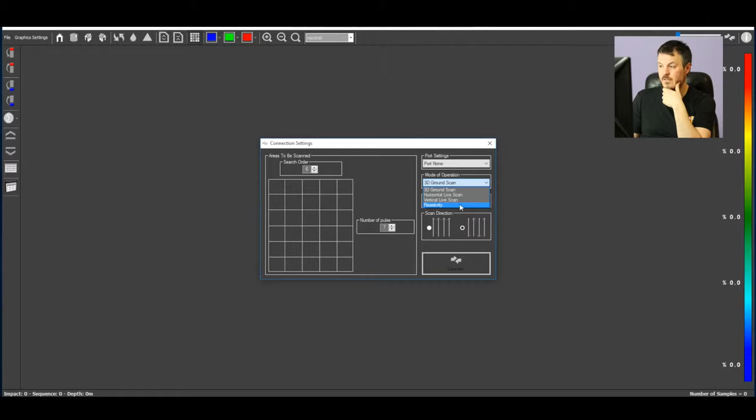Then you have to choose which kind of scan you're going to do. 3D ground scan is what you use for all our radar series. Okay? Horizontal live scan and vertical live scan are used only with X1, X5 and X1 Pro. And resistivity is for IRS or the resistive feature of X5. But here we're going to use ground scan. And then you just press connect.

We would like to remind you that on each DRS device you can choose manual or automatic scan. For automatic scan, the machine will beep. So every beep you will make a step. So it does like beep, you make a step, beep, you make a step. It gives you a rhythm. It's a very nice feature. Or you can use the manual feature. With the manual feature, every time you make a step, you just press the joystick. Okay?

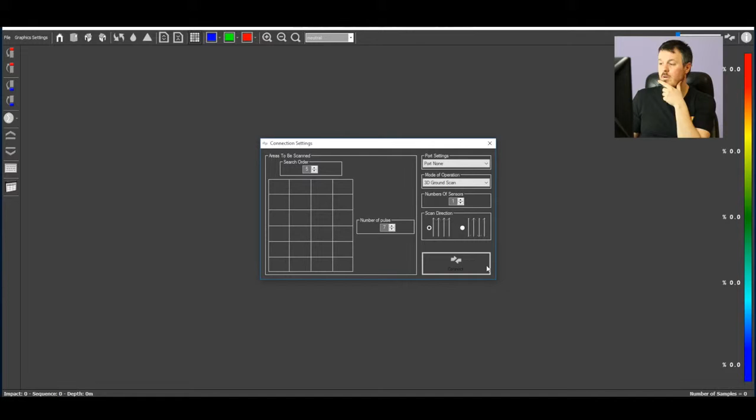Now, let's see the file. We've just recorded an iron object. Here it is. Let's start with 2 dimensions. You see, here you can see a red square, always on the lower right hand corner. So basically, we've been scanning 16 steps by 6 columns. So 16 steps of 30 centimeters, that's barely 5 meters, by 2 meters.

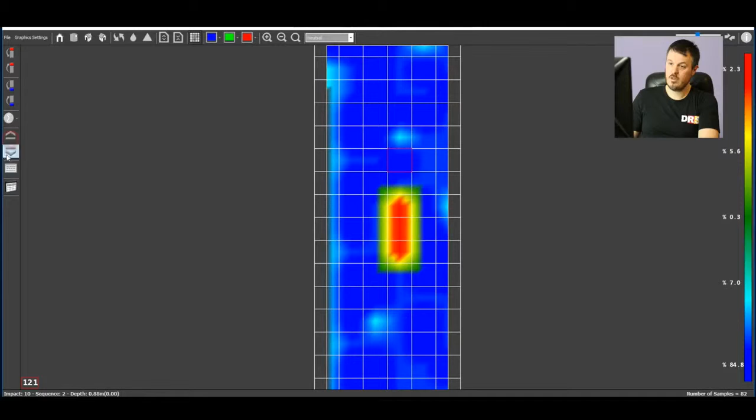So look, you can navigate like this with a keyboard, or you can also use this thing. There is an embedded keyboard here. Okay? But we will use this. Every time you move the cursor, you can see on the lower left corner that the value changes, 121. Now here, where the object is, we have 235, meaning that we definitely have a metallic object.

How can you make sure it's a metallic object? When you open a file, you can see on the right corner a scale of color. If the metallic object is red, yellow and orange, look at the total of the first 2 values, see 2.3 and 5.6, where it's barely yellow-orange. If the total is below 10, then you can imagine this target is metal. Let's see, 2.3 plus 5.6, that's 7.9. So definitely red here marks a metal object.

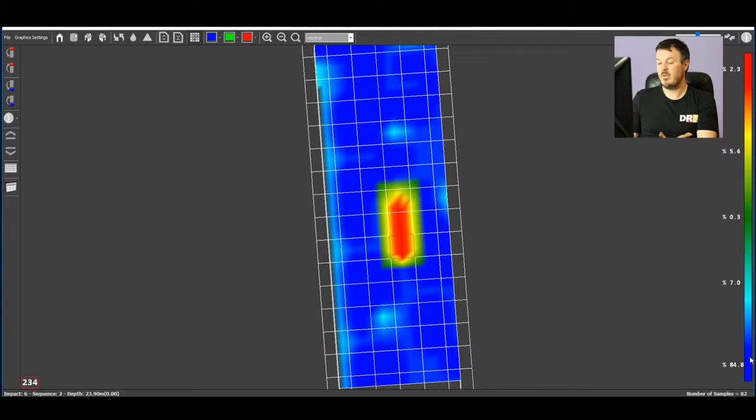But the blue, we say it's a cavity, but not always. It can also be a field that has been turned. So here we have 84.8 for the dark blue. If it is a cavity, it has to be 100%. If it's below 100%, it's not a cavity, it's just ground, okay? So here, 84.8, it's not a cavity. Here we have a metallic object, definitely, but it's not in a cavity, it's just in regular ground.

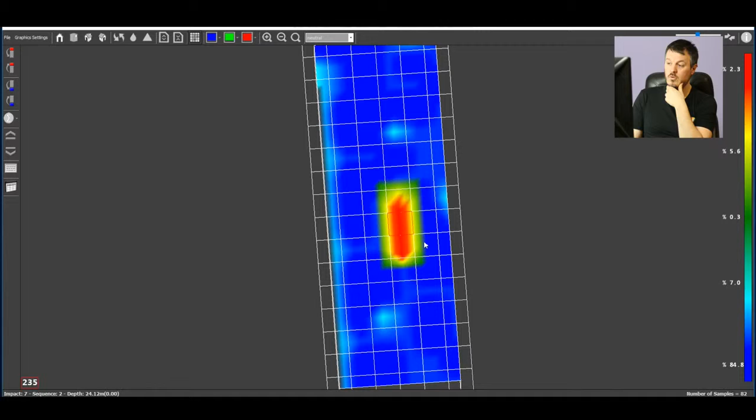How can we determine the size of the object now? Okay, we have three squares for the length times 30 centimeters, that's 90 centimeters, let's say 1 meter. Let's imagine the width now. The width is just one square, see. So that's 30 centimeters. 1 meter by 30 centimeters. The buried object on our test field is basically an old rusty pipe, okay?

Now let's try to imagine what kind of depth we have here. Okay, so let's go 3D.

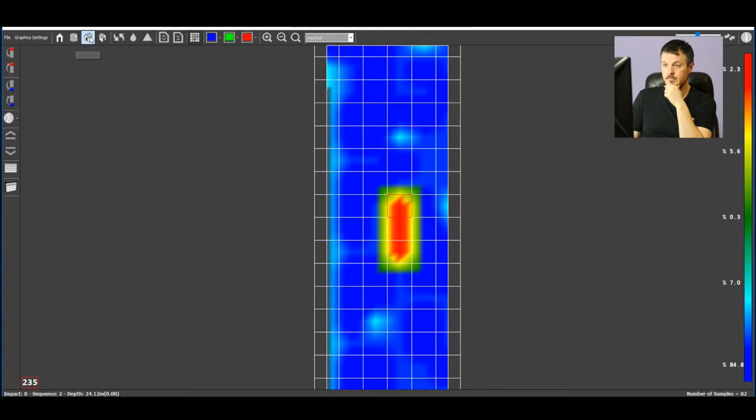Okay, you can see the depth is here. The first thing you have to do when you open your file is tell the software which kind of soil you've been scanning. Here we use sandy, okay? Remember that the percentage of humidity, the type of ground, whether it has rocks or not, will really influence the result you get on the software. So sandy is pretty neutral.

So let's use these two arrows on the left of the software to determine the depth. So the object starts around here, 2 meters, you see 199, and goes to 270. So our metallic pipe is between 2 meters and 2.70 meters deep, okay? Since it's a pipe, it's round, it's 30 centimeters wide, so it's very good and it's accurate. So you have a 30 centimeter pipe between 2 meters and 2.70 meters deep.

Very interesting here, you can see that there is a very visible cut. When the red is cut like this, it's metal, but most of the time it's iron. When it's cut like this, it's iron. It means that the signal has been cut. And you have a really high chance that this is iron.

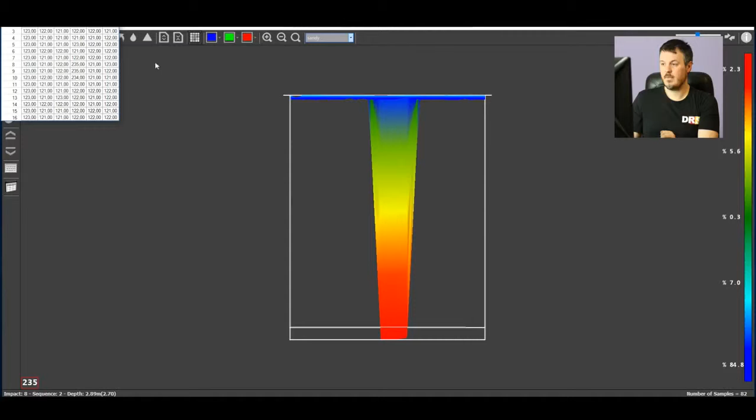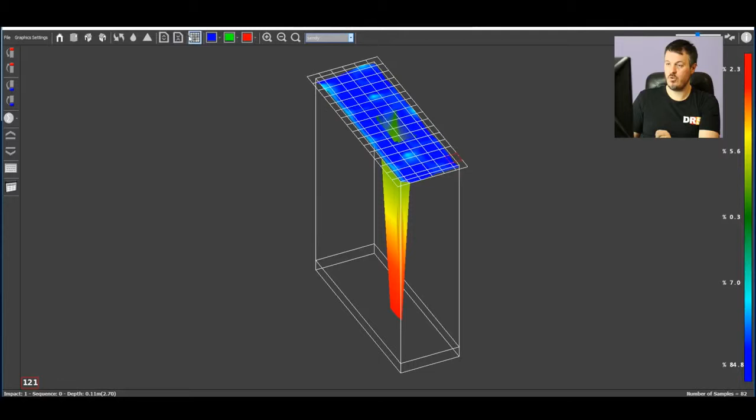Finally, we'd like to show you this. Let's get back to 2D. You see here we move the cursor and you see the object is here. Okay, you see it's still moving here. Our object is here and you can see the value here. Look, 235. Let me show you. If we get back to 2D, okay, let's open this. You see it's here.

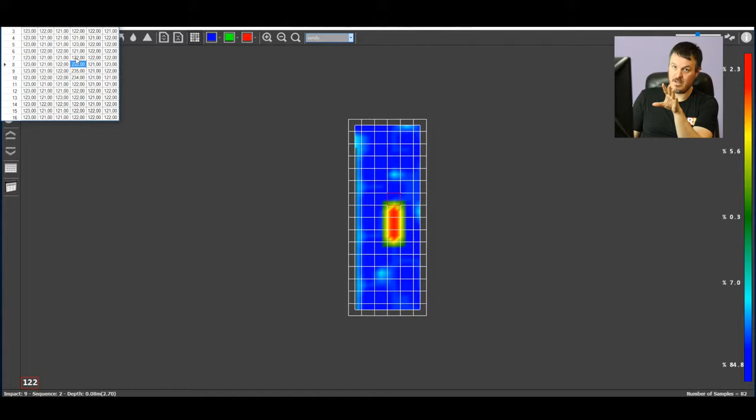Our value that's interesting is 235, 235, 235, 234, and it's row number 4, 1, 2, 3, 4, you see, and it's step number 10, basically it's here, you see, so it's perfect. You see the value here, 235, that's our metallic object, and you can see the scan values appear and are interpreted directly by a color in the software. So you see it's very, very neat. You can determine the size and the depth of the object thanks to our DRS 3D software.

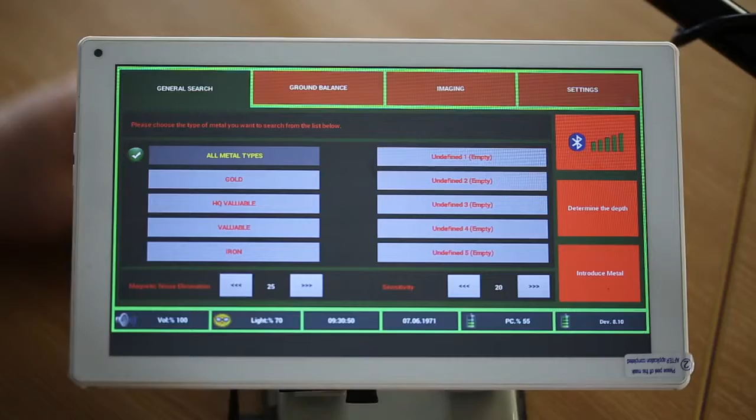There's no Bluetooth. So to activate Bluetooth, of course, you turn on the control box and then you click here. Then it will synchronize. Connected to Ground Expert. And then it will tell you which coil is connected. Small coil is connected. So let me show you all the features. Remember, we're inside. So you should never use a metal detector inside, but for the demo purpose, we have to. So there's a lot of electromagnetic interference, what we call EMI.

So first, magnetic noise elimination, we try to eliminate, you see, okay. Then sensitivity, the more you put sensitivity, the deeper it goes, but here, we need it to be stable for the demo, so we only put 20% sensitivity, even 15, because under the table we have iron, so we may have a problem. So general search shows you what you're going to detect, which metal you want to select or not. Ground balance is basically what you have to do first.

Ground balancing is usually something complicated with other metal detectors. This one, Ground Expert, does it automatically and it's very easy. What you need to do, you put your coil 3 centimeters above the ground. Same thing for the 45 centimeter coil. If you're going to use a 1 by 1 meter frame, you have to put it 10 centimeters above the ground. Then you just press ground balance.

The value will go usually between 120 and 140. If you have a value that goes below 100, it means you have a cable problem. The coil has a problem. And if it goes above 200, it means you're trying to ground balance your detector on a metallic target, which should never be done. It's like a hobby detector. You have to ground balance your detector on a clean area without metal, okay?

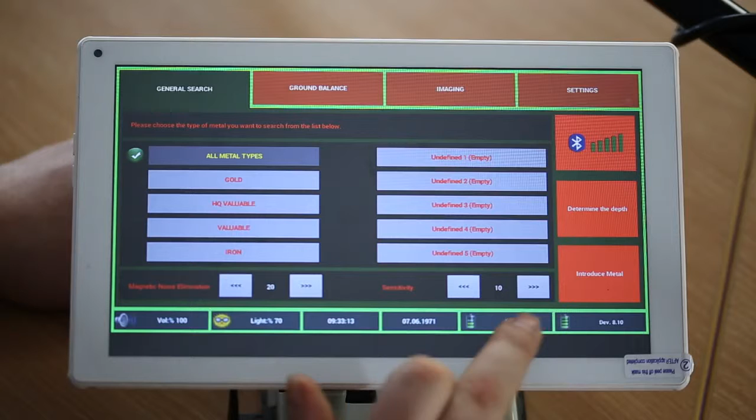To start the test, we don't put it on. I will show you what it is for just after. Here it tells you which version you have, and the autonomy remaining in the tablet PC and in the control box. Remember, when you have low battery, the discrimination is not very effective. To have very good discrimination, you always need full battery level.

Ground Expert is a metal detector, meaning you can find all kinds of metal. It's not like other DRS products such as resistivity meter, magnetometer, or GPR. It just focuses on metal, so you cannot find cavities or other anomalies, just metal.

So look, one kind of metal, copper. Gold is metal too, lead is metal, and iron. That's what other professional metal detectors do. You have a big frame and it just tells you that you have metal, but you cannot tell the difference. So you waste a lot of time digging on junk.

But with Ground Expert, it's really different. Let's see, we want to find all metals. We want gold, we want highly conductive non-ferrous, and we want basically non-ferrous but with lower conductivity. But we don't want iron, so I don't select iron. Look, high conductivity, you see, highly valuable. The same with lower conductivity.

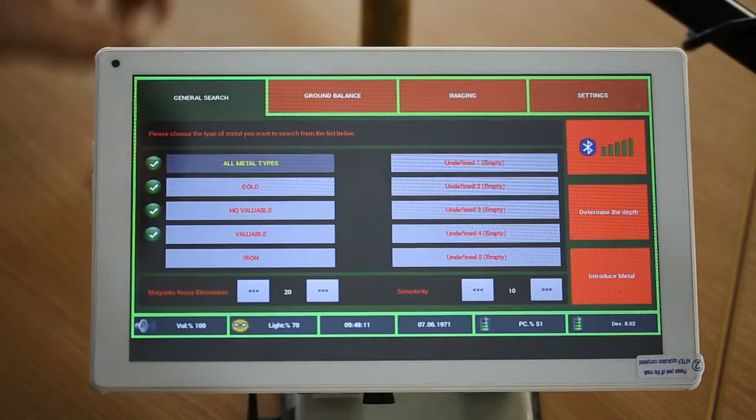And gold, pink gold, pure gold. Whatever gold you use, it will always say gold. It's a very interesting feature. Lead, it's all metal type too. But look, iron. It's all metal, but it's not gold, it's not highly valuable, because it's iron.

Look, if you select iron here, so you have true discrimination. It means you want all the metal but just iron. And then all metal, but it's not iron. But look, iron. So you have really a true discrimination, but it's not all. We will show you something else.

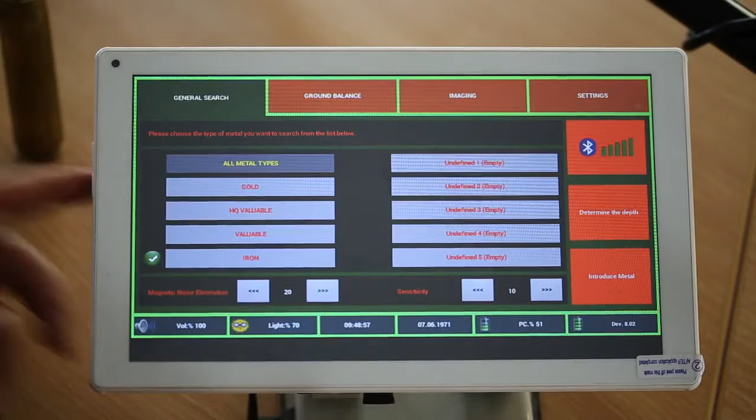Imagine you just want to focus on iron. So you find iron. But imagine you just want to focus on gold, which is a little stupid, but look, gold. Pink gold, no problem too, look, gold.

But imagine you don't want copper, look, no copper. And look at this, you get rid of this completely. It's a big object, high conductivity. You get rid of it, but still you have the little piece of gold.

And remember, we use a very, very small sensitivity level because we have a high degree of electromagnetic interference. That's why we have to be closed, you know.

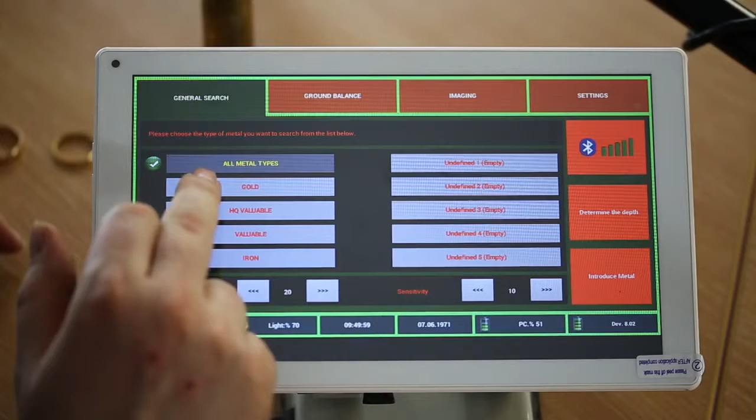Okay, that's very interesting, but sometimes we have problems. This is lead. Oh wait, it says gold, you see? Sometimes it says gold. It's really a problem because you think it's gold, and it's the same with aluminium. You think you're going to find something very interesting, but it ends up being junk, like lead or whatever.

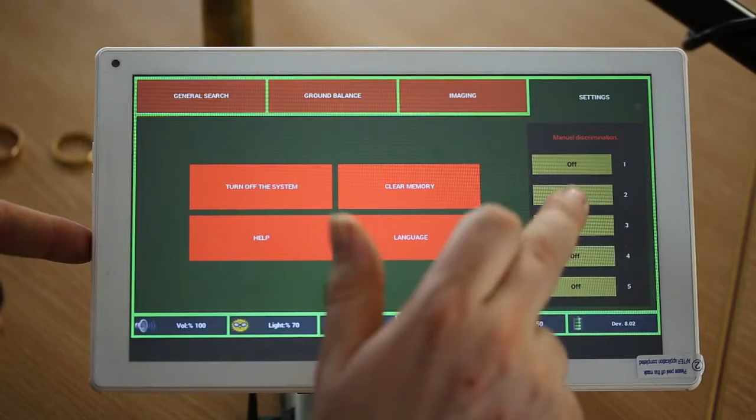So here comes a new feature. Go on settings and go to level number 3. It's like manual discrimination, like on a hobby detector. Then you come back here. So look, you just want gold, imagine. And now, every time you pass, lead doesn't beep, but gold does.

So imagine, let's put up lead, no sound on lead. It's going to be the same on aluminium, but gold, pink gold, no problem. And pure gold, look. No other detector in the world, even hobby metal detectors, is able to do this. Ground Expert is the only one that can do this. It's just incredible.

I am now going to introduce you to another exciting feature of the new Ground Expert Pro: the imaging function. To show you this, we will use small gold first. Imaging function allows you to see the shape and the length of the target as well as its metal type before you even start digging.

Gold. The detector understands you have gold, but now you want to see the shape of the object you find. Go to Imaging, push Create New Image, and then to simulate the swipe, you push 4 times, it's a double swipe, on the button of the shaft. If you want, you can also use the button on the control box if you're using the big coil. If you don't have the shaft, you use this button.

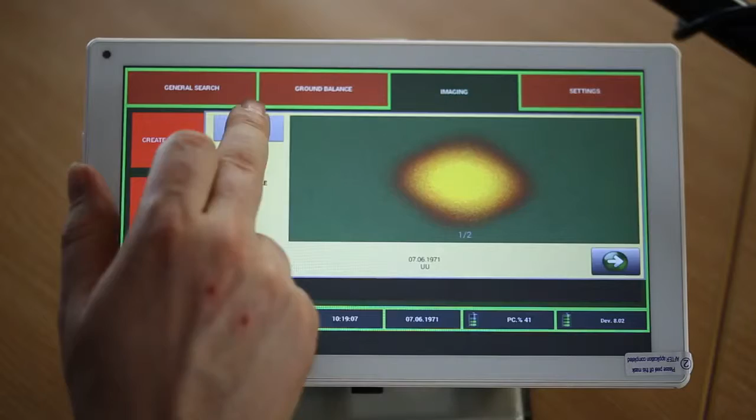Create new image, but for iron we need to select iron. Look. Okay, let's go to imaging now. Create new image, let's try with iron.

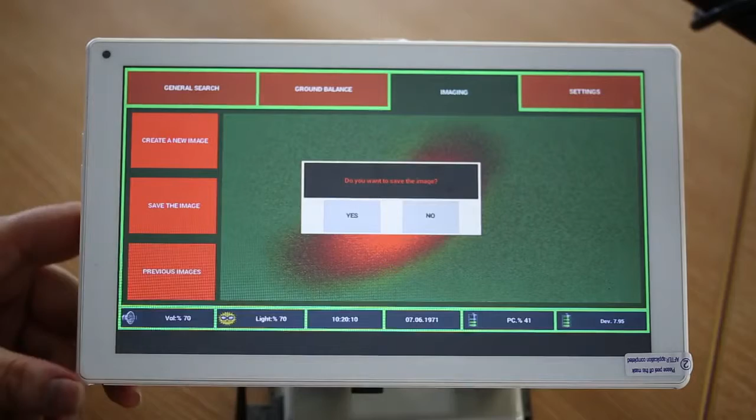1, 2, 3, 4. You see, it's a longer object. See the shape, it's perfect. And then we save the image and we call it iron.

And then let's take a look. You see this one and this one. You have the gold ring and the iron. This is just incredible, and you see it's red because it's iron, so it's red, and gold is yellow. This is the color we chose. But if you want high conductivity and lower conductivity, it's gonna be green and purple. That's why, once again, Ground Expert is a very exciting machine.

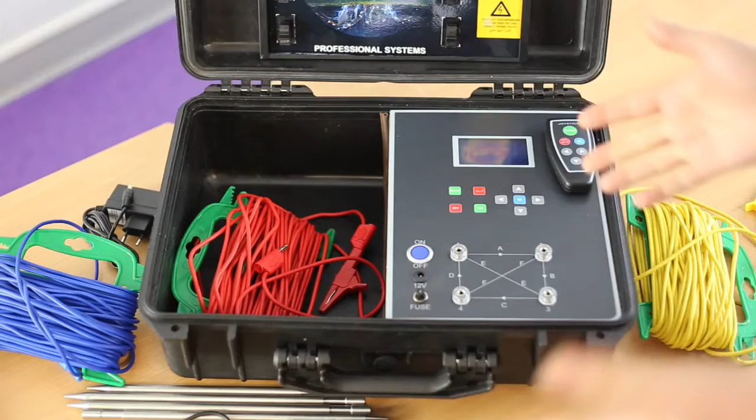ARS is very easy to use. The first thing you have to do is determine which zone you're going to scan. So imagine this rectangle symbolizes the area we are going to scan.

Imagine we put in the middle our control box. This is our control box, this case. But if we have the X5, we put this in the middle. Then we put these probes here, here, here, and here. Then each probe is linked with the cable, and you put the cable here.

For the demo, we're just going to assume we use 2 probes. What's very interesting is that if you want to use 2 probes, you can double the length of the cable, and therefore double your depth if you plug them in parallel.

So we are going to scan this area, and we suppose that the control box or the X5 is in the middle of this point. So let's turn on the machine.

ARS turns on. You can control it with the joystick or with the keyboard. We will show you on the keyboard. You have 4 menus: auto scan.